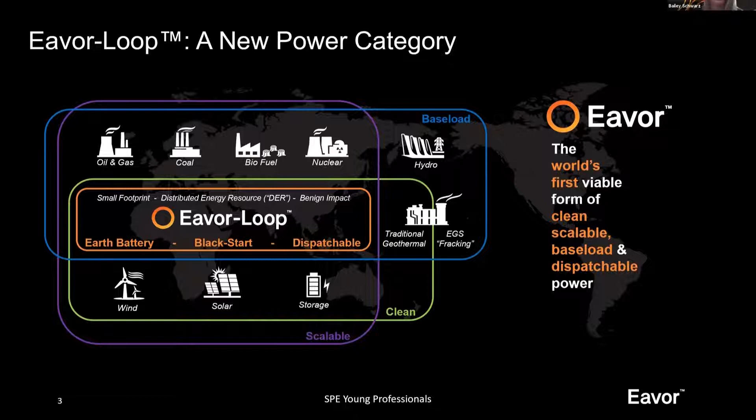So really looking at how this compares to traditional geothermal and why traditional geothermal isn't scalable. To date, geothermal energy accounts for less than 2% of global energy production, even though it's an abundant resource - heat below your feet, the deeper you drill, the more heat you get. So why don't you see more geothermal out there?

Really what's limiting it is that it's an open system. In a traditional geothermal system, you have an injection well and a production well, and you're relying on natural permeability or induced permeability through EGS or fracking to allow that fluid to flow through the reservoir, pick up the heat, and then be produced out. You're producing a brine on the production well side.

What we're doing in Eavor-Loop is actually building a closed system. So we drill our two wells, our inlet and outlet well. The blue would be your inlet well, so the cold water is injected. What we're doing is creating essentially a big radiator subsurface - we're drilling multilateral wells that intersect at the toes, forming loops that make a big heat exchanger.

So you're relying on conductive heat transfer. You're not doing any exchange of brine with the reservoir. You're basically sucking heat out of the rock, producing it to surface, and then either extracting it for a heat application or converting it to power on surface.

So the benefit of this is that you don't need to locate that rare permeable aquifer, and that's one of the reasons why there's so much exploration risk with traditional geothermal, similar to oil and gas exploration, and why you can't term traditional geothermal as a really scalable solution.

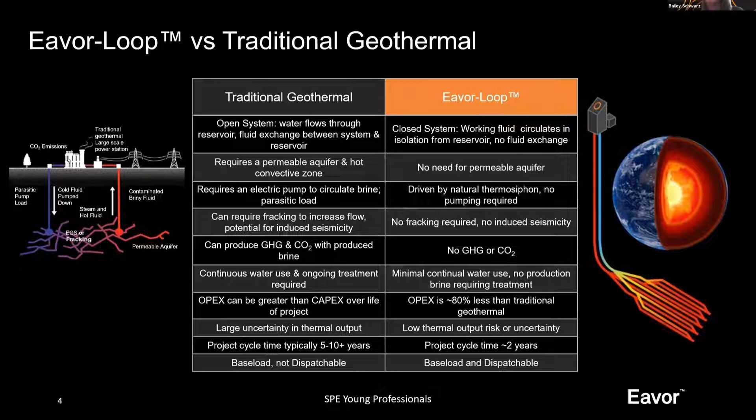The cycle time is 2 years. So like I said, you can understand what that output is going to be very early on, so you can actually do a lot of work in parallel in terms of drilling, designing a power plant, and constructing the whole system. Versus traditional geothermal, there's an exploration phase, a testing phase, then a design phase, and then you're finally into execution—typically a 5 to 10 year cycle time. Most critically, and where that ZELFR acronym comes in, is that it's got this baseload and dispatchable characteristic.

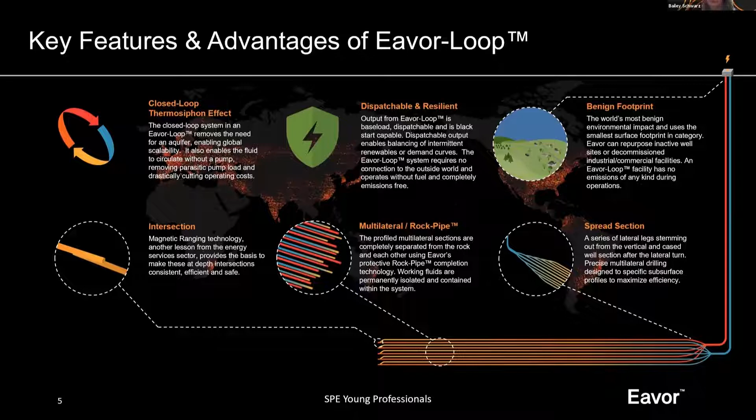I'm not going to get into each of the key advantages because we've got a really great website, so if you guys are interested, go on there. Basically, we've spent the last 2 to 3 years designing and really refining the technology. We've got a lot of IP in terms of how we actually drill and construct, the enhanced fluids for what we're flowing through the systems, and work on how we can minimize the surface disturbance and footprint. So we're really trying to make sure the technology product we're offering is the most optimized, most competitive product on the market.

Looking at the footprint, I think this is a good comparison for the same annualized output when we're talking about solar and wind, which a lot of people are focusing on for this energy transition—how much space that actually requires, and why this can be a really great distributed solution that you can locate close to cities, in communities. It's a distributed energy resource. For the same output, you can see 300 hectares for wind, about 1/10 of that, so 35 hectares would be an equivalent output for solar, and then about 1 hectare required for an Eavor-Loop for that same output. So the surface footprint is really small. For us, it's that subsurface footprint, as you're building out that radiator section, where all of that surface area is really developed.

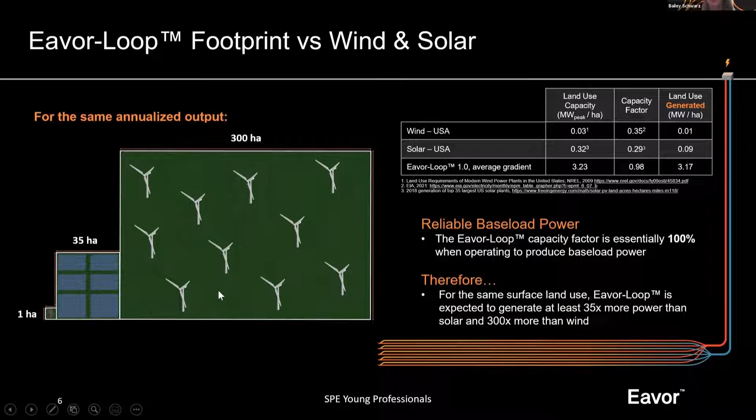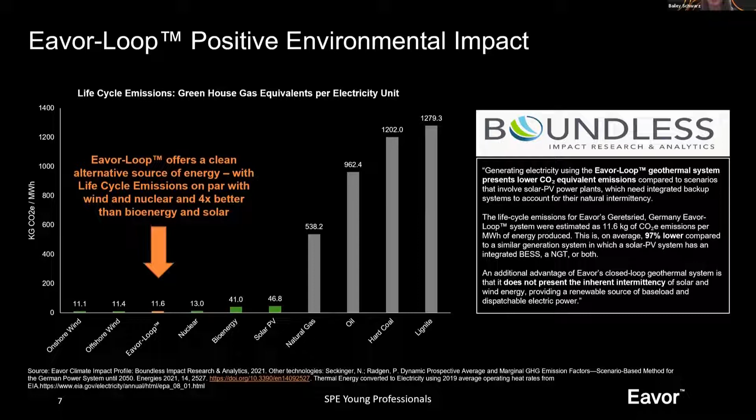Another point on the positive environmental impact: one question we get a lot is, okay, when you're producing, you're not emitting, you're not generating any emissions, but if you consider the whole life cycle—the emissions generated when you're spending 1 or 2 years drilling out big projects, and any of the consumables you're using for facilities, casing of your wells, things like that—how do you actually compete, and are you offsetting those emissions required to construct as you go through the life of the project? So we worked with a company called Boundless Impact Research and Analytics, and they did a full life cycle assessment of Eavor, the Eavor-Loop electricity, and then compared it to offshore wind, nuclear, solar, and hydrocarbons—natural gas, oil, coal, and lignite. You can see that we're basically on par with wind and nuclear, and about 4 times better than solar when you look at that full life cycle of emissions associated with building and operating the project. So definitely really positive environmental characteristics for the technology.

I think the most interesting and compelling point, when looking at the robustness of transmission systems and grids, is that a lot of problems are happening in places with high penetration of renewables like solar and wind—these rolling brownouts or lack of stability in the grid, because you have these peak periods of production followed by pretty rapid declines as the sun goes down or wind stops. We don't really have a good solution right now to backfill that capacity outside of natural gas turbines that can respond on demand, until you add the Eavor-Loop into the mix. Basically, what we can do is turn down the system, slow the circulation rate, and store that heat subsurface. Then when needed, you can speed it up and produce over baseline nameplate capacity, dispatching that energy without degrading total output over the life of the project.

So you're basically just storing and discharging with a really high efficiency.

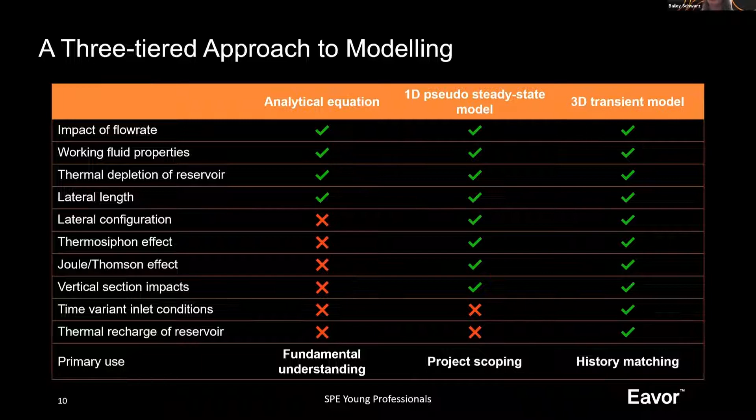And then we've also validated with a 3D model, a 3D transient model. So this lets you do time variant inlet conditions, test out that dispatchability feature of the Eavor-Loop as well. So we built these models, we've run them all against each other to make sure that we're getting really good consistent alignment between the results.

And then we've also had our studies or our modeling validated by numerous third parties, both giving them independent assumptions and letting them build their own comparable geometry loops and coming up with the same answers, or going through our methodology and vetting our methodology as well. So we've worked with NREL in the US, TNO, that's a research organization based in the Netherlands. We've done a lot of work with academic institutions. UT at Austin and the University of Toronto have all replicated our work with good agreement. And I think there's recently been a paper published by the Canadian Geological Survey as well, that's available to the public online.

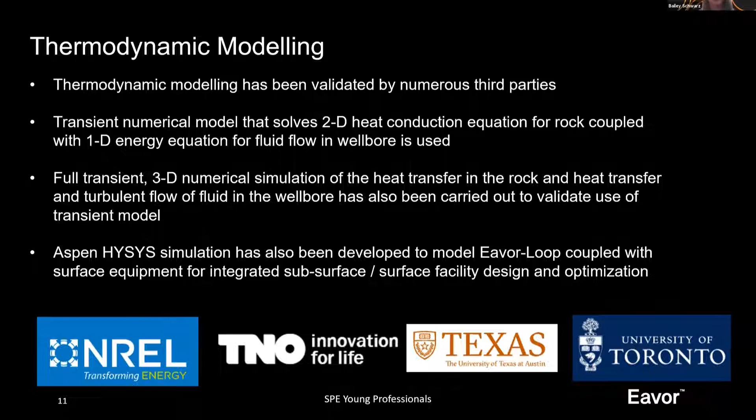So yeah, I think we've got at this point a lot of confidence in the modeling, and we also have some results that I'll share with you shortly from our pilot project showing the results in the modeling compared to actuals. So I'm not going to talk a lot about this.

So we split that problem into a whole bunch of little slices of rock and of fluid flowing. And then we look at conservation of momentum, conservation of energy, as you've got that fluid flowing through the wellbore, and as you've got heat that's basically being transferred in every direction from the rock to the fluid, from hotter rock to colder rock. So really a complex, discretized model that solves in increments as you step your way through the full system.

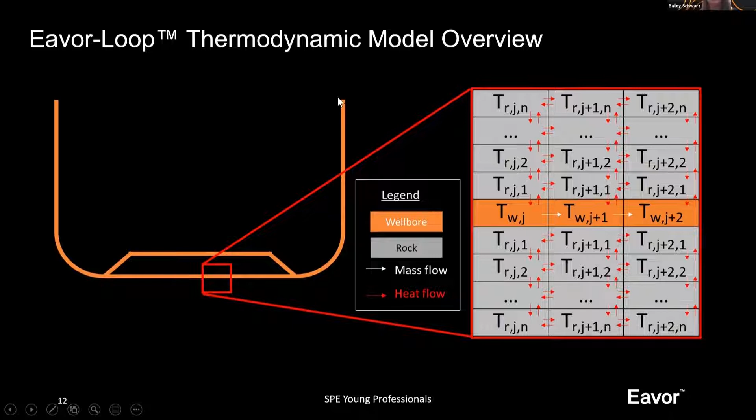So what you do is you input your inlet well parameters, so the pressure, temperature, and flow that you're entering the loop, and it will work its way through this whole subsurface system and calculate out your outlet conditions, so the temperature and the pressure that you're now producing at.

And then a pretty stable and minimal decline beyond that point. And my heat output, same thing. You can see it declines and then tends to stabilize as you get to year 10 and beyond, which is what you would expect to see, that radius where the rock immediately around the wellbore cools.

You're going to have less heat that's transferring out. So as I mentioned, what we do is we will pick a design point that will give us a representative flat output for a 30-year project life. So we would say here, it might be a year 5 or year 7 design point that would give you that annualized output over time. But we have flexibility for how we would operate it. So you could choose to operate at that maximum thermal output and just have your energy decline over the 30-year life.

The other really critical tool that our modeling gives us is the ability to understand how that thermally affected radius will grow over time and ensure that we're spacing the multilateral wellbores far enough apart that we mitigate any of that interference in the early periods or within that 30-year project life. So we make sure that the modeling is valid because we're not seeing that thermal interference between the lateral wellbores.

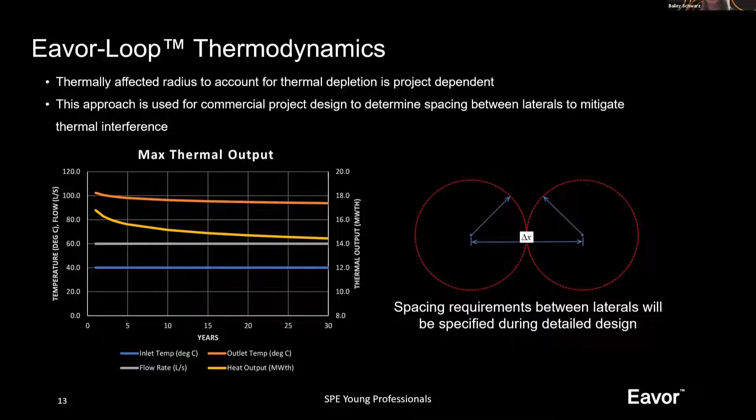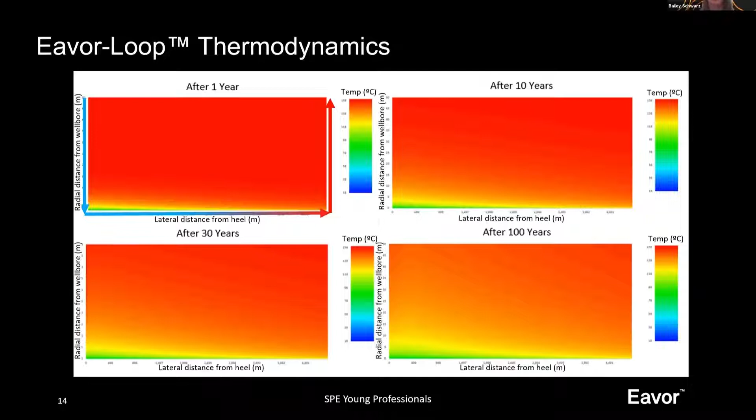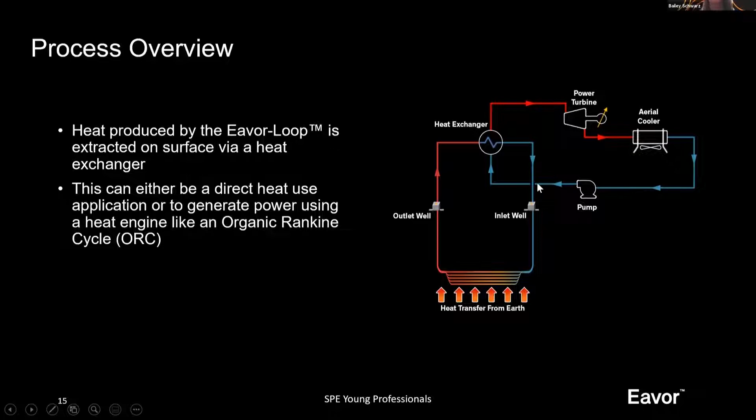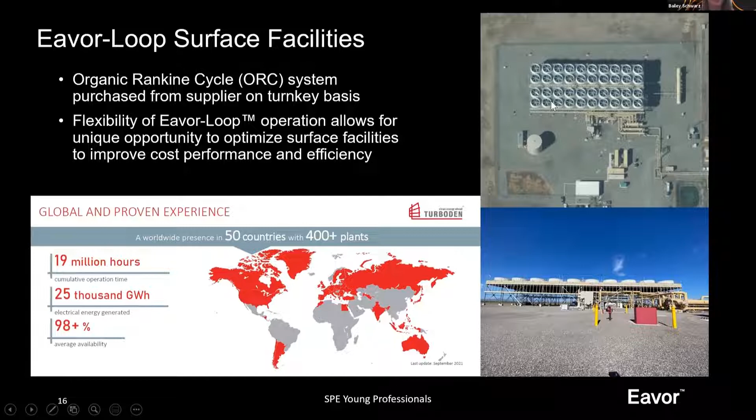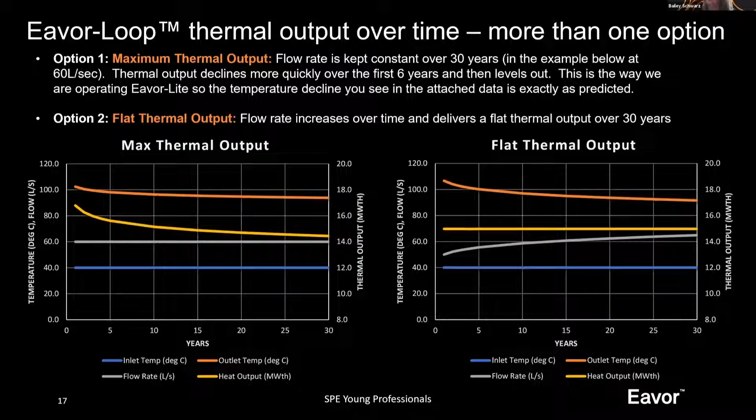So what this enables us to do is partner with these organic Rankine cycle manufacturers and do a lot of iteration through the design phase to make sure we're designing the most optimized integrated system, between the Eavor-Loop on subsurface and the facility on surface. We're making sure we're getting the maximum amount of power, because we have some levers we can pull to tailor those produced fluid conditions to what will get us the highest efficiency out of the organic Rankine cycle.

Okay, so that's kind of an overview of the technology and how we approach the design.

So Eavor-Lite, this is a project that we constructed back in 2019 in Rocky Mountain House, by Red Deer, Alberta. This was really a scaled down version of an Eavor-Loop. We were trying to pick the most cost-effective way to prove out the three key questions that kept coming up from investors: can you actually do this?

Number one was, can we actually drill and intersect these two wellbores kilometers below the surface? Number two, can we actually seal and pressure test the Eavor-Loops? And I should have mentioned earlier, we don't actually case the lateral sections - we seal that with a rock pipe completion system, a chemical sealant we've developed in-house that chemically seals that wellbore. And then number three was the thermodynamics - we've done all this modeling.

Do the actual results line up with the predictive results we're getting from our modeling? So what we did is we built a scaled down version of the Eavor-Loop. We have an inlet well and outlet well at about 2.4 kilometers total vertical depth, and then the laterals themselves are 2 kilometers in length - a really scaled down version.

If you think about a commercial project, this would typically be 3 to 5 kilometer depth and a 5 to 6,000 meter lateral section, and then 12 laterals rather than just 2 here. So we picked a scaled down version so that we could cost effectively prove these 3 key objectives.

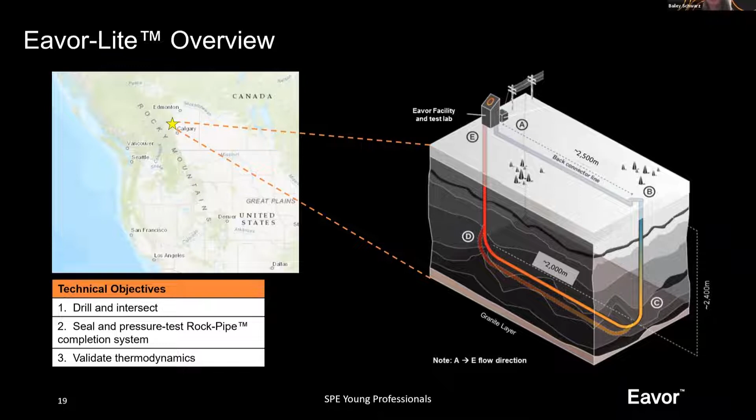In terms of what we were doing with the heat here, because we're not close to a grid, there's not really a heat user offtake at this location. We've just got an aerial cooler extracting the heat from the water to show that the thermosiphon will work, but we're not using the heat for anything. It's just a simulated heat user that allows us to establish that delta T for the thermosiphon to be tested.

So high level timeline, we started design on this back in Q1, Q2 2019.

Q3 we drilled, Q4 we built the surface facilities, and then starting in December we commissioned and we have begun operating the facility. On the left hand side here you can see the 2 drilling rigs, that little speck in the background. They are 2.5 kilometers apart, but you could stand on the one rig and see the second one in the distance.

This shows an as-drilled profile for that intersection point. And then the team that actually was on the rigs responsible for that first intersection.

This intersection technology is active magnetic ranging, something that's used in industry typically for relief wells and well intervention, or for SAGD for ranging of well pairs. We actually flipped it on its head and used it for the opposite purpose of intentionally intersecting well bores, rather than the avoidance piece.

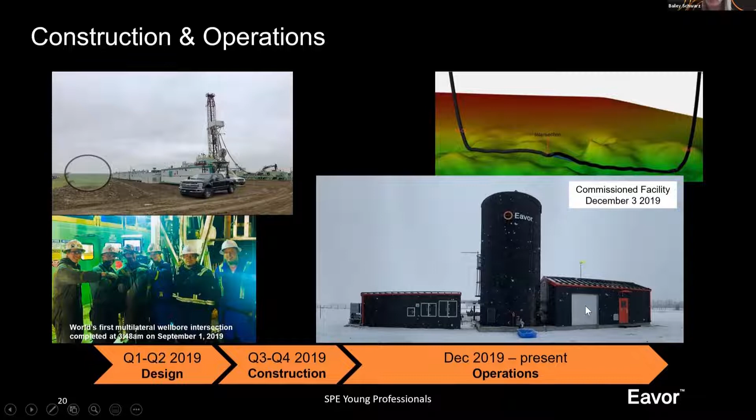This is a picture of our fully commissioned facility, pretty straightforward surface infrastructure. We've got a storage tank. This building houses our production wellhead and some metering. This building holds our control and monitoring panel, metering, and a little startup pump that we ran for 4 hours to get the system running and establish that temperature difference. The aerial cooler is just on the back side of this building.

In terms of proving that we could drill and complete the system, we successfully completed 2 intersections for the 2 laterals that I showed. The first one was nearly a direct hit, we had about 84% coverage. You can see on the left here, the green is the well bore we were approaching, and the blue is as we were drilling in and basically got that almost perfect intersection.

The second one, we learned a lot more as there was some interference because we now connected one of the lateral well bores. Great learnings in terms of how you would apply that to scaling up for 12 intersections for a commercial project. It just took a little bit more time to steer and intersect into the second well bore, but we were able to successfully do that and confirm a full mechanical intersection on both well bores, or both lateral legs.

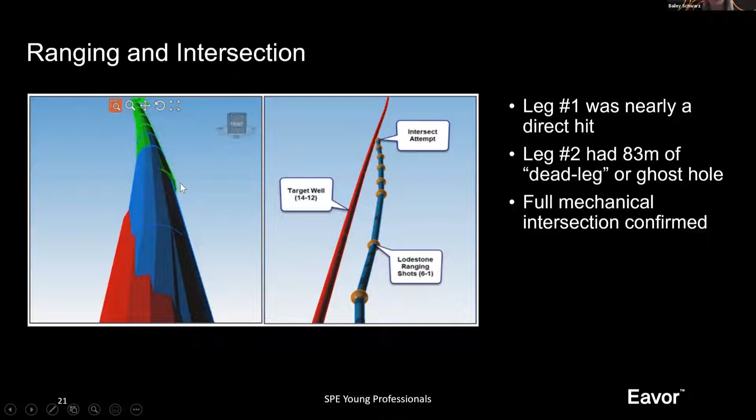In terms of our sealing, this is showing our rock pipe. This is some plug testing we did in the lab, some sorted core with plug flow testing, so we're flowing the rock pipe through that core. What it does is it basically permeates into the near wellbore and then sets up, and that's what's preventing any fluid from your system leaving or from the reservoir coming into the system.

In addition, we're operating basically in balance with the reservoir, so making sure that we're not creating a huge driving force for fluid transfer to occur.

This trend is showing that since we started up at the beginning of December 2019, we're monitoring the overall volume of the system, tracking whether or not we're seeing any of our Eavor-Loop fluid being lost over time. When we initially started up, we were seeing around 0.6% of system volume. We'd set an internal target criteria here, and what you're seeing is there's a very, very minimal amount of leak off. Right now we're stabilized to less than 0.1% of the total subsurface system volume, but we're continuing to see this downward trend over time.

Now what we're using this Eavor-Lite facility for is an R&D test site. So if there's things we're trying to understand better about the system, or that we want to test out, we can use this as a test to get a pilot scale test completed. We've been looking at different ways we can supplement the sealant, and in general how this trends over time, because naturally in the fluid the sealant is circulating in perpetuity. So if there are any leak points, by its nature it would leak off and then self-seal at those locations. We'd expect to see this continuing to trend down over time, but this is an area we're continuing to do more R&D on as well.

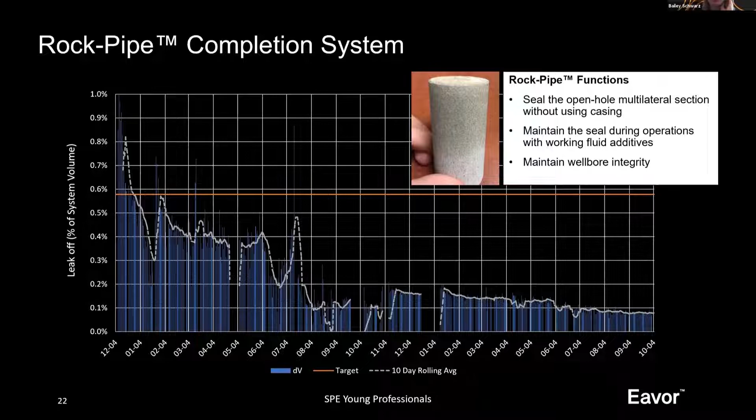And then in terms of the thermodynamic modeling, how's the performance relative to what we had predicted?

So what's shown here in gray is the circulation rate. Initially we were trying to operate things fairly steady state, and then we were running a few trials where we were changing the flow rates around. In orange, the orange line up top is the predicted output, and the little circles are the measured output. So since we've started up, and this is 16 months of data, the mean absolute error we've seen from our modeling is only 0.37%.

So really, really good agreement, as expected, because it is a conductive heat transfer problem and not a lot of complexity once the models are built and structured. Really good agreement with the predicted results.

And so this extrapolates to future commercial projects when you're looking at what assumptions have gone into building that model, that we can estimate that output within a very, very narrow range. And there's a lot of certainty on what that performance will be over very long time spans.

And I guess for the dispatchability piece as well, you can see areas here where we've actually stopped flow for a period of time. This is testing the recharge - are we properly accounting for heat that once you stop circulation, your wellbore is going to heat back up? You can see that that actually is the case, and it's being accounted for properly, that when you start back up, you see a bit of a spike in temperature, and then it starts to trend back with that decline that you would expect.

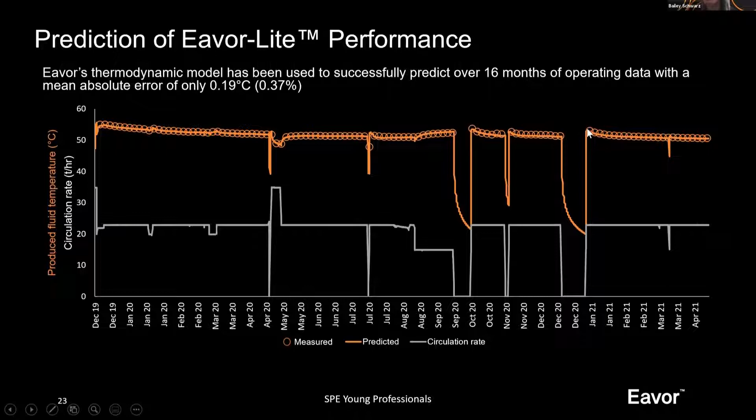The other interesting thing we did at Eavor-Lite is we placed a 6-point thermocouple string in the outlet well. So what we can do is measure the temperature profile at 6 discrete points as it's being produced at the vertical outlet well. You can see from the trends on the left-hand side here as well, at each location we're seeing really good agreement throughout. So that just means more confidence that we understand the physics and what's happening as that fluid's flowing through the full system.

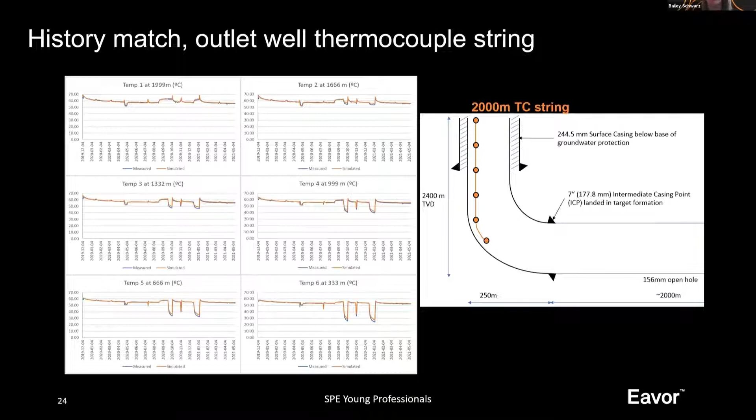So that's kind of where we're at. We've had this pilot project now being operational for 2 years. Really the focus of the last year has been to look at commercializing this technology.

So the near-term focus areas for us - because we are a new technology, we're kind of at that peak of the cost curve. Solar a decade ago, when solar panels weren't so cheap, you can think of the exact same thing here. We're kind of at the highest point of the cost curve. We're looking at markets that could support first commercialization. There's places like Germany where they've got geothermal feed-in tariffs that support a significantly higher electricity price for a 20-year duration, because the policy there is trying to promote more geothermal activity. So those are some of the early markets that we're looking at.

In Germany in particular, we've got now a German office set up. We're looking at a first commercial project that we're developing just south of Munich in Bavaria, and then a whole bunch of other prospects that are coming along the front end of the project development pipeline as well.

And then focusing on how we're really going to come down that cost curve through basically manufacturing. This is similar to how drilling costs have improved in some of the big, like the shale revolution, as you see drilling costs drop to 60% of what they had initially been over a decade of drilling that same type of geology. We're expecting that you'll see those exact same cost curves appear as Eavor-Loop start getting built and rolled out globally.

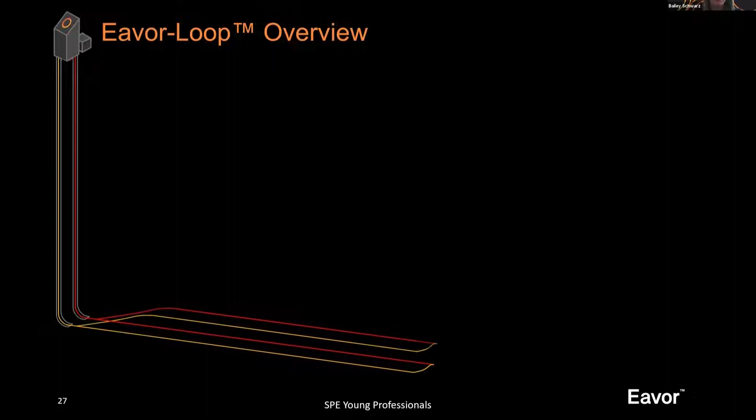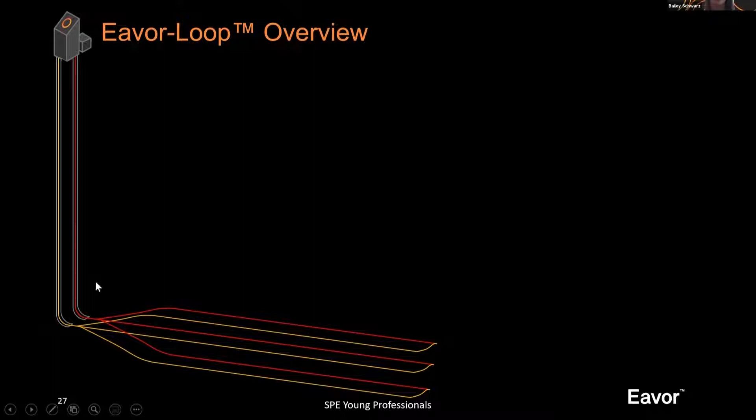the commercial configurations. When I mentioned before, the Eavor-Lite had 2 separate surface locations. For any of our commercial projects, that would actually be cut in half and flipped in on itself. Both of your inlet and outlet vertical wells would be drilled from the same location.

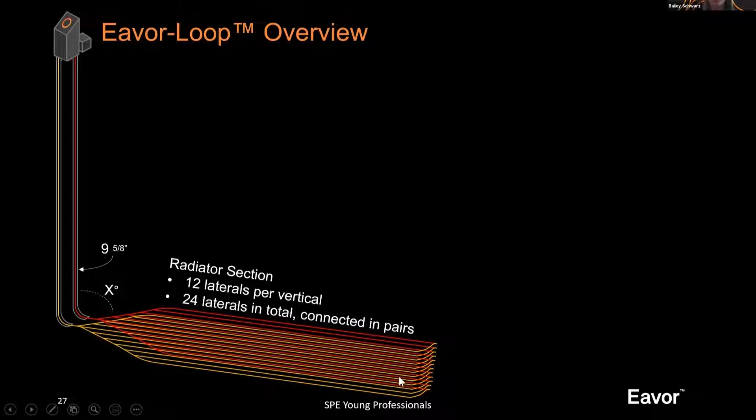And then your laterals intersect at the toes in a bit more of a hockey shape type configuration here. So a little bit better from an execution point of view, because when you're doing your lateral drilling and doing that ranging, you've got clearer line of sight for how the trajectories are lining up and how you need to be positioning for the intersections to occur.

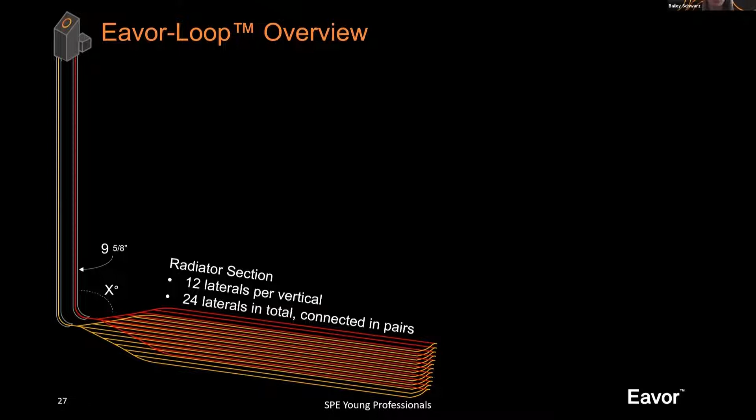So looking at the technology roadmap here, Eavor-Lite we've executed. Eavor-Loop 1.0 is essentially this design, but you're targeting sedimentary zones here. And so the laterals extend at a 90-degree angle and are chasing that sedimentary zone.

And the next progression of the technology for us, moving into that global, fully scalable solution, is actually accessing the igneous basement rock. So what we would do is drop the lateral legs down to more of a pitchfork type design, so they're propagating down instead of at a 90-degree angle.

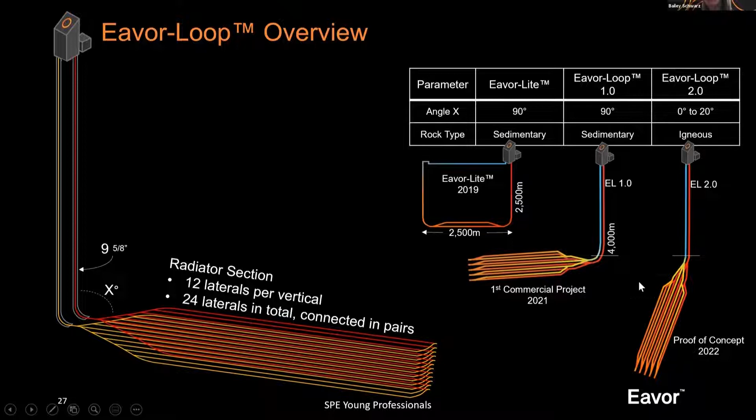And what this allows is it basically boosts the thermal output per installation, because now you're accessing a higher average rock temperature for the whole placement of that radiator zone.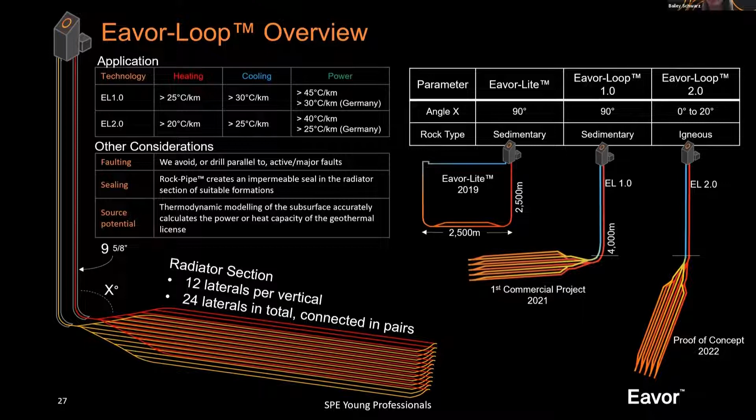So a lot of considerations that we look at as we're scoping out and building out our pipeline and our commercialization strategy, but really right now focusing on 1.0 type projects in markets that support them, and then moving on to demonstration of that 2.0 technology.

We're getting a lot of interest just because there's so much emphasis on ESG investment, energy transition, renewables, and we truly are that only resource that can be a ZELFR that can contribute to the energy stack in that way right now. So that's basically everything I'd prepared, and I'll hand it back to Wenju for Q&A.